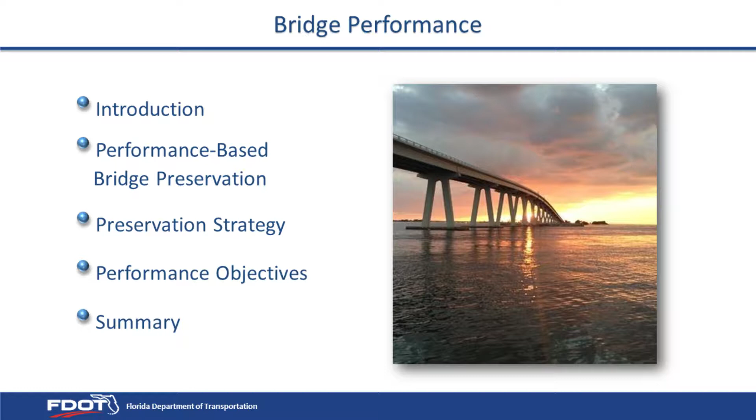I'm happy to be here with you this morning to share our experiences with ongoing efforts related to the development of bridge preservation-related performance measures. After a brief introduction, we're going to talk a little bit about how we're currently set up in usage of various performance-based mechanisms that provide work on our bridges. I'm going to talk a little bit about preservation strategy we'd like to promote further in the future, as well as some performance objectives that may be tied to that strategy.

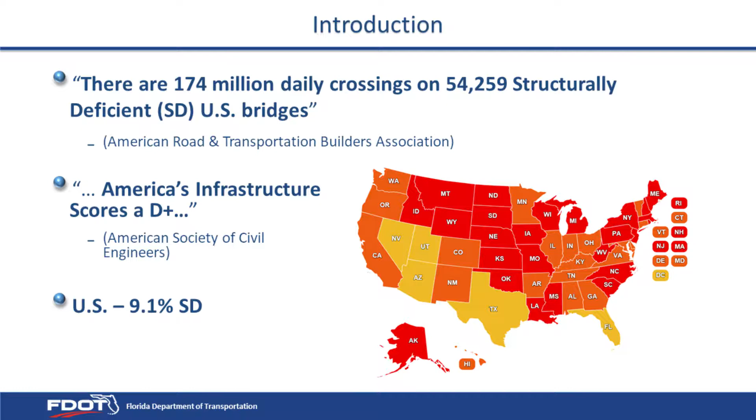First, I think here are a few headlines that are all too familiar with us these days. 174 million daily crossings on over 54,000 structurally deficient bridges in the United States today. Wow, that's a lot of people. ASCE indicates America's infrastructure scores a D+. Well, that's not too reassuring. So right around just under 10% of all bridges in the nation are currently considered structurally deficient today.

But here's the good news, though. For any of you guys who have been tracking that number, we've been steadily trending downward for as long as we've been reporting on that metric, percent structurally deficient bridges. So we must be doing something right. I think a lot of that has to go with the amount of research and focus that we put in this area as an industry. How's the saying go? If you measure it, you will achieve it. Something like that. That's exactly what we want to talk about today. Developing performance measures to drive bridge preservation type strategies and activities.

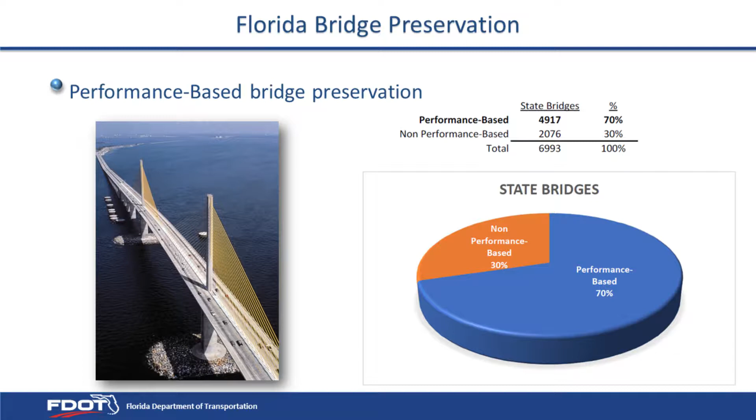So originally when we began looking at this type of information, I would say our focus was more related to our various performance-based contracting mechanisms. For those that may not be aware, Florida has been steadily transitioning more and more to greater use of performance-based contracting to operate and maintain our transportation infrastructure. We have shorter term, what we call asset maintenance type contracts, where the contractor will assume the risk of all general maintenance and repair type activity. And we also have longer term concessionaire type contracts where the contractor will assume a bit more risk, usually in the form of either rehabilitation or replacement should the need arise within the term of that contract.

So right around 70% of all state-owned bridges are currently included within the scopes of these contracts, some way, shape, or form. And that's almost 5,000 bridges, and that includes some of our biggest and most prominent bridge structures. So our current processes for driving the work on bridges is pretty heavily dependent upon our inspection activity to identify work needs and drive our work programs. So we think that there's opportunity for greater consideration for doing those types of things that pay long-term dividends for us over time. So a little bit on the approach.

So about a year ago, we established a small technical working group we call the Bridge Performance Group. The main focus of this group is to review our various performance-based mechanisms that provide work on our bridges and look for opportunities for improvement. So it's an 8-member group, and given the contribution that private industry plays in caring for our bridges here in Florida, we thought it was pretty important to include their representation within this group. So we have 3 serving members from individual private industry firms who participate in our performance-based programs. We have 2 serving members from our central office, as well as 3 serving members from some of the districts.

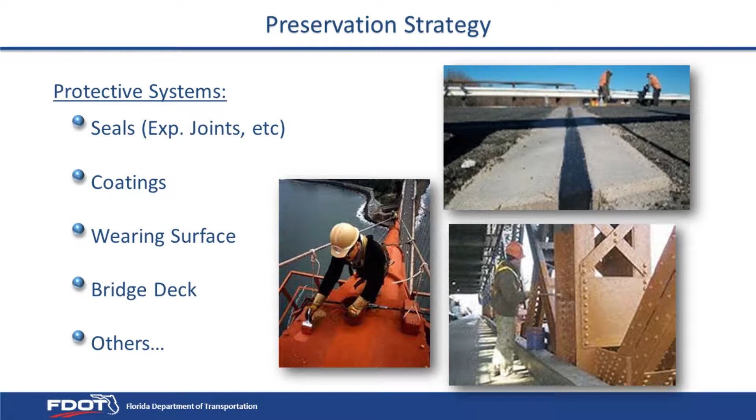So as far as bridge structures, we know that there are certain types of elements and components on bridges that I guess I would say serve more of a protective role in nature. Things like our expansion joint systems and our seals help keep our water and debris up on top of the deck. Things like our coating systems help protect our structural steel from corrosion and degradation. Wearing surface helps protect our bridge deck from traffic-related abrasion.

Even the bridge deck itself can play a protective role in nature at times. I think sometimes we look at the bridge deck, it's kind of the roof of our house. Sometimes if our roof starts to leak, we know it typically contributes to bigger problems down below for us. Are there others? Absolutely. This is just a short list of some commonly recognized protective systems for bridge structures.

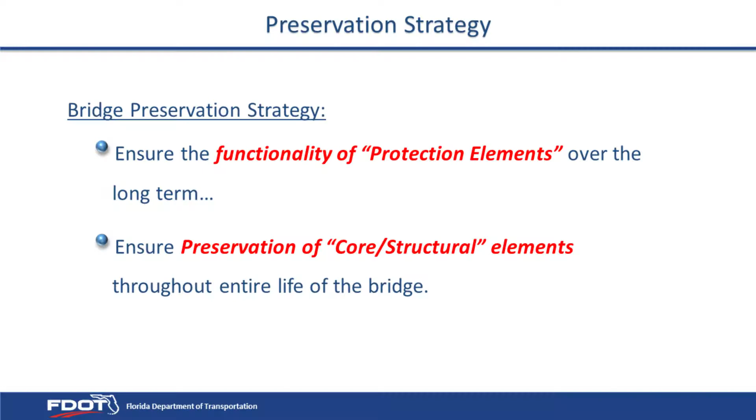So as far as overall strategy, we know that it's usually a pretty good idea to continually ensure the functionality of those systems that are more protective in nature. If we do this consistently and effectively over the long term, we stand a pretty good chance of preserving our core structural elements throughout the entire life cycle of the bridge. Sounds like a plan. So how do we drive performance as it relates to these goals?

Well, we know the bridge inspection process is a pretty valuable tool in our toolbox. Our inspectors are out there generally once every 2 years, reporting on condition and function of every element and component on the bridge. We call this our element level inspection criteria. So we assign a condition rating on a scale of 1 to 4, 1 being the best, 4 being the worst, on every unit of every element on the bridge. So there's lots of detailed data that's generated through this process.

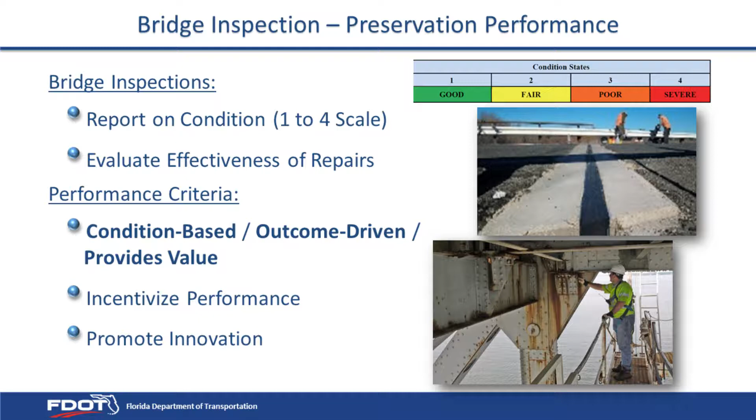So we think that there's opportunity to leverage the value of that data to inform and report on the condition and function of those systems that are more protective in nature, to make sure that we're doing the right things at the right time. So as far as performance criteria, we believe there's opportunity for what we're calling condition-based, outcome-driven performance measures that will serve to provide value in the overall life of the bridge.

Remember those 3 terms, condition-based, outcome-driven, and provide value. I'm going to talk a little bit about each one in detail in the next few slides. We believe, if appropriately established, they will serve to incentivize performance and promote innovation as a whole in our processes. So what types of things are we talking about?

Well, we believe there's value in minimizing the leakage in our deck joint systems, because when our deck joints begin to leak, we can see elevated rates of deterioration in portions of the bridge in the immediate vicinity of those leaky joints, especially for steel superstructures and bearing components. We believe there's value in maximizing the effectiveness of our coating systems.

For any of us who have watched our coating systems degrade, we know it's never uniform. Typically, we get early onset and breakdown in those hard-to-coat areas first, whether it's on the nuts and bolts, the edges of plates, those areas that collect debris, retain moisture. We believe there's value in ensuring a uniform level of protection for all of our steel components out there.

So when I mention condition-based, generally we're talking about leveraging the reporting that occurs through our bridge inspection process to inform on condition and function of those systems that are more protective in nature. For any of us who have recently observed the changes in our inspection standards, we know that our information has become a little bit more detailed with the advent of new standards.

So no longer are we only reporting on quantities within the individual condition states 1 through 4, but we're also reporting on quantities of what we call commonly occurring defects, which can vary based on material type or even type of system, whether it's an expansion joint system or a bearing system, things of that nature.

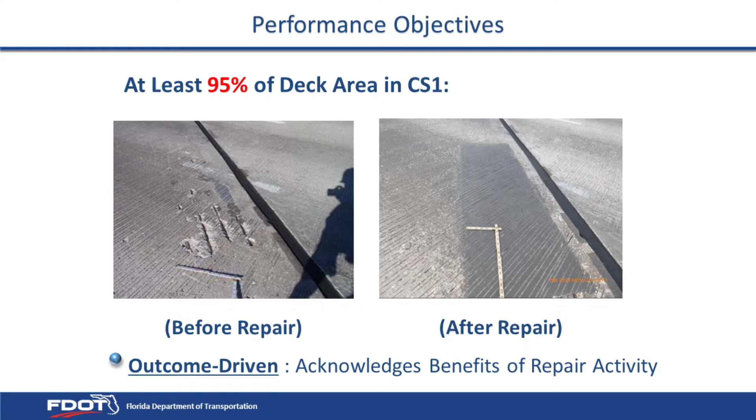That's really the outcome-driven portion of what we're talking about. We'd like our process to acknowledge the benefits of repair activity where appropriate in restoring functionality. Because in the absence of acknowledgement, it becomes a bit more difficult to encourage or even incentivize doing those types of repairs that could pay long-term dividends for us. In this instance, that moves us in the direction of expanding our definition of what we consider good to now also include condition state 2.

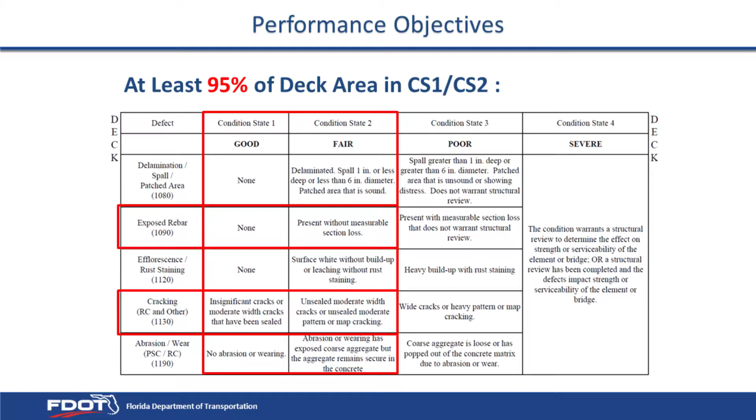What we realize is that now opens up the door for a few other defect scenarios that we may or may not be comfortable with. If we look down below at cracking, we see that condition state 2 allows for unsealed cracks of moderate width. I don't know, on the deck top, an area that's exposed to continual wet-dry cycles. In the north, we're putting chlorides on our decks. Not in Florida, but northern states.

We could be exposing our reinforcement to undue corrosion activity. Certainly, exposed rebar, defect 1090, condition state 2 allows for present without measurable section loss. Really, this is what we're talking about.

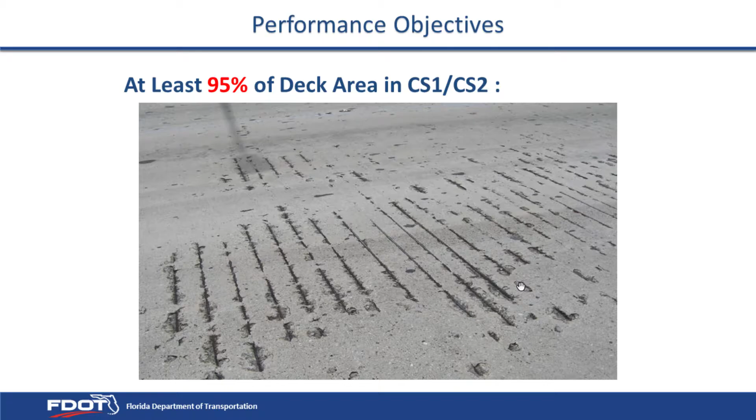Sometimes, for any of us who have ever watched our rates of deterioration for reinforced concrete components, we know that there are certain types of scenarios that when they present themselves provide for, let's just say, a tipping point in our overall rate of deterioration. Things really begin to pick up steam. Exposed reinforcement is a good example of that.

Spalling occurs. If reinforcement's exposed, corrosion's initiated. Corrosion is an expansive process, exerting internal stresses within the concrete, contributing to further spalling, further exposed reinforcement, further corrosion initiation. So it just becomes a cycle at that point. So this is a good example of a typical defect scenario that we'd like to take steps to avoid, if at all possible, because it tends to promote higher rates of deterioration in our base components.

And that's really the value aspect of what we're talking about. We want to set ourselves up for success, make sure that we have the greatest opportunity to preserve our bridge structures, to realize our full asset value potential, which has really brought us to where we are today when we consider our performance measure format.

So we're currently considering a format that includes two main parts. So the first part is going to include a condition state criteria, where we look to ensure that we have at least a certain amount of good quantity in support of overall functionality. Second part is going to include defect criteria, where we look to take steps to avoid those undesirable defect scenarios that can promote higher rates of deterioration in our base components.

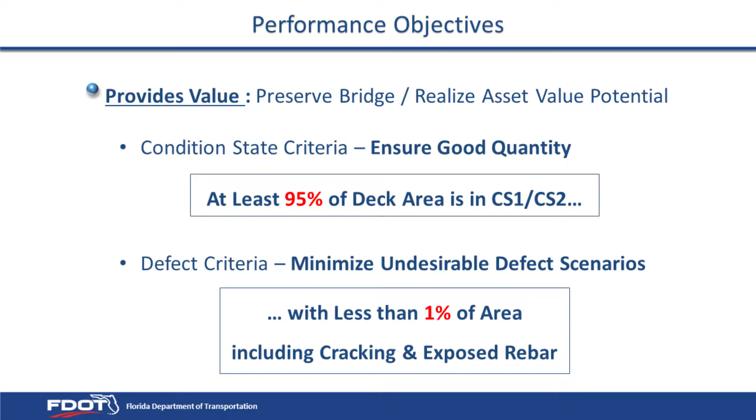So here's that same performance measure in blue restated with the two parts. For the reinforced concrete bridge deck, we're saying we'd like to see at least 95% of our deck area in either condition states 1 or 2, with less than 1% of area including either exposed rebar, defect 1090, and significant cracking, defect 1130.

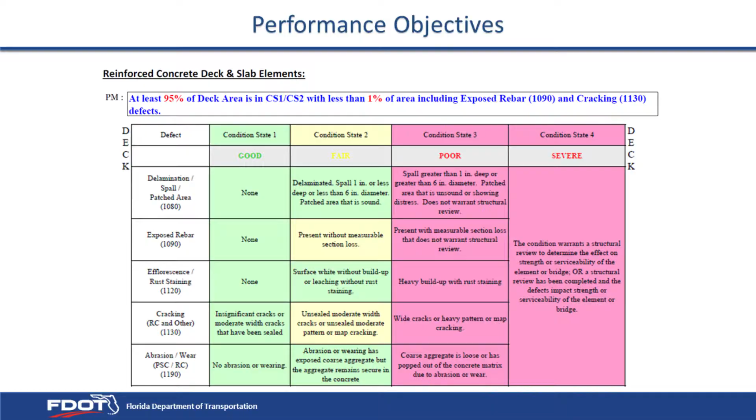So as we look down below into that same table, condition evaluation criteria, we see that everything in green is within the realm of our stated performance objective, acknowledging the benefits of repair activity where appropriate and restoring function, and avoiding those undesirable defect scenarios that can contribute to higher rates of deterioration as much as possible.

So given the same two-part format, we're currently test driving draft performance measures related to the various types of deck systems that we have. Reinforced concrete, pre-stressed concrete, steel, timber decks, and that other category, kind of a catch-all. Again, using that same two-part format, and the only place that they vary is in that defect criteria, that second part, because our commonly occurring defects will vary based on material type.

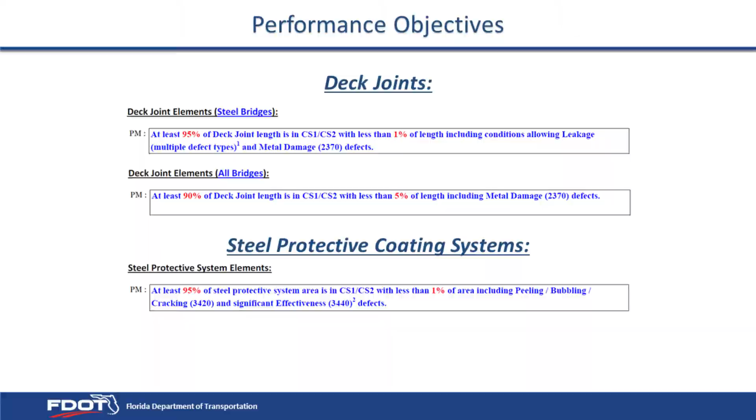We're also looking at 2 on our expansion joint systems and 1 on our steel coatings, again using that same two-part format. So the first one on the expansion joint systems is really targeted for those bridges that mainly contain steel components below the deck that may be vulnerable to corrosion, whether it's steel superstructure or bearing components. So it's really intended to minimize the occurrence of leakage in our deck joint systems as much as possible.

Whereas the second one on the deck joints has a little bit wider tolerances, and it's applicable to all bridges, whether it's concrete, steel, or any other bridge type. And it's really intended to discourage a larger breakdown in our joint system. So we're really trying to stave off those scenarios that might contribute to erosion around our substructure components or debris collection around our bearings.

The one on the steel protective coatings is focused on functionality more than anything else. It's really intended to minimize the occurrence of where our underlying steel is exposed and vulnerable to corrosion. So again, all of these are using that same two-part scenario to ensure a certain level of functionality in those select components and ensure value for us over the long term.

So one thing we realized is that as we reviewed these types of items, we figured that we needed some tools to gauge the potential for them to provide value for us over the long term. And so what we did is we simply developed a spreadsheet that allows us to report on these types of metrics. And it contains a querying mechanism that allows us to interact with our larger statewide bridge inspection database, BRM. And simply allows us to bring in only the information on select populations of bridges however we choose. In this case, we're reflecting whole districts, about 700 bridges.

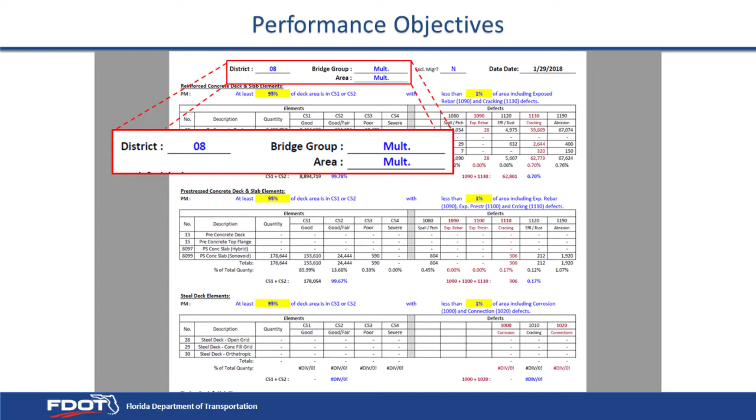We can identify a bridge group, say one tied to a performance-based contract or a maintenance yard designation, however we define it, big or small, and simply set up to report on these types of metrics. What you're looking at here is the deck summary, reflecting on each of those material types, and under each material category we've got a data table reflective of those elements that comprise that material type within our deck systems.

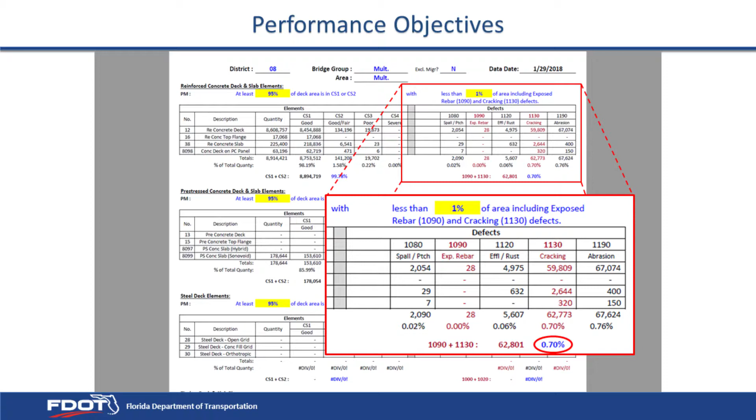The left part of the data table reports on our efforts to ensure we have a certain amount of good quantity, generally condition states 1 and 2, whereas the right side reports on our efforts to minimize the occurrence of those undesirable defect scenarios.

One thing we realized as we began plugging bridge group after bridge group into this tool is that the information could vary due to a lot of different influencing factors. So we developed an overall summary that allows us to view the information in context with those other factors, whether age, detailing, or types of bridges. All information is reported on individual populations of bridges, however big or small.

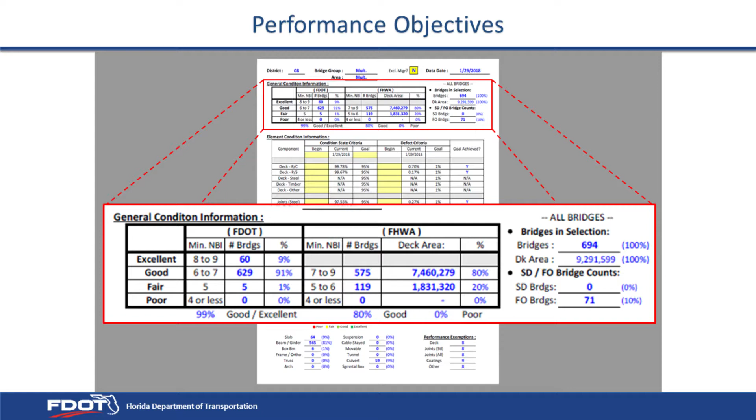The top portion is reflective of our general condition ratings, based on those minimum NBI components. In Florida, we've used a 4 classification scale for a long time: excellent, good, fair, poor. We're also reflecting the newer FHWA criteria, which has just 3 categories - good, fair, poor - dependent upon those percentages by deck area.

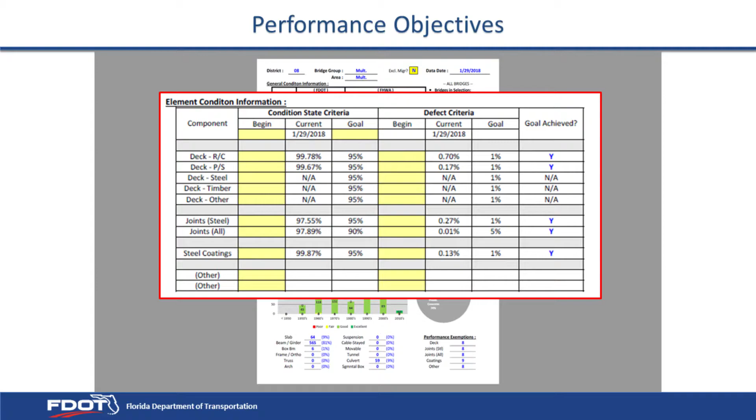In the middle, we're reflecting on those element level performance measures that support our bridge preservation objectives - listing those we spoke of: 5 on the deck, 2 on expansion joints, 1 on steel coatings, and we've left room for others as well.

We wanted to set up a framework that allows us to view the change in this type of information over time on these metrics. For example, if we had a 10-year performance-based contract, we could record baseline data in the beginning column at the start of the contract and provide interim reporting, probably on a 2-year basis, as we progress through the term to make sure we're staying within our performance expectations.

Down on the bottom, we're reflecting various bits of miscellaneous information - those other influencing factors. We're listing decade of construction, which gives us a sense of detailing, general condition, bridge types, our material distribution - just to give us a sense of what potential challenges may lie within this particular population of bridges.

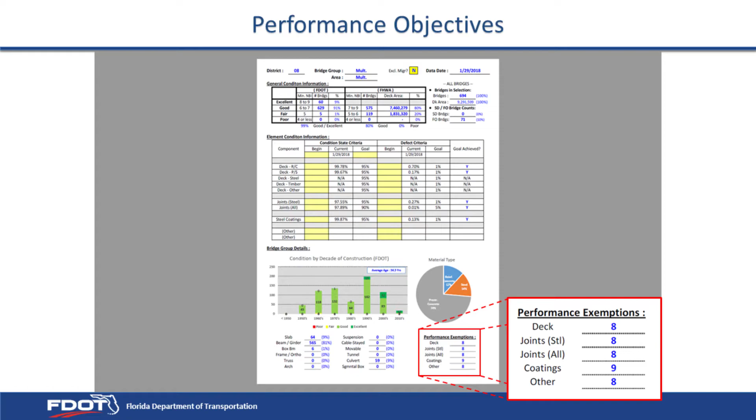Down here on the right, you see performance exemptions - a tool we developed that allows us to better coordinate with ongoing work on our bridges. It's listed as an exemption in the respect that it allows us to omit either select bridges or portions of bridges from the element level reporting that supports our bridge preservation strategies.

For example, if we have a lot of bridges coming out of service, we could omit the reporting on those bridges. In a sense, when we turn off the reporting, that's the driver of that type of work activity, because we really want to make sure our valuable bridge preservation resources go to those bridges that need it most - bridges that will be in service for a while.

In summary, we're currently looking at condition-based, outcome-driven performance measures that we believe will provide value in the overall life of the bridge related to our deck systems, expansion joints, and steel coatings. Are there others? We've been talking a lot about movable bridges lately. We'd really like to wait until we get to the end of our first bridge inspection cycle - the first 2 years, we'll be there probably in January of next year - before we finalize those performance thresholds.

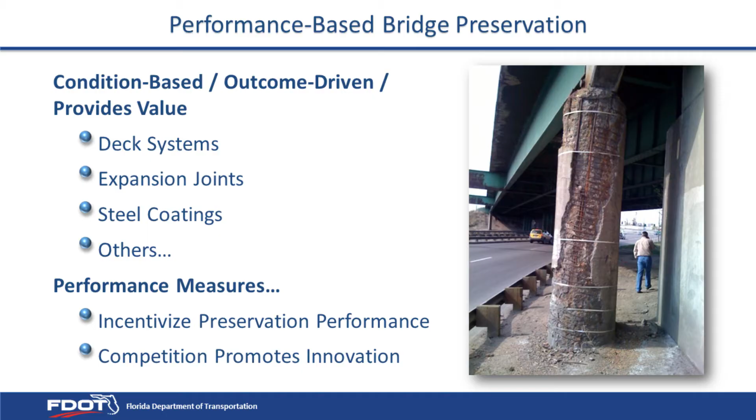We believe performance measures, if appropriately established, will serve to incentivize preservation performance in all of our processes, whether there's a performance-based contract or not, and provide an opportunity for our best and brightest contractors to compete for our business on the basis of bridge preservation, which is really a win-win situation for all.

You mentioned a couple of times you want to maximize condition states 1 and 2, and also have a focus on minimizing the undesirable defects. Why are those two separate? If you focus on minimizing, won't the maximization automatically happen? Remember when I said the devil's in the details?

As we look at the various criteria contained within each of those condition states, some condition states are worse than others, or some defect scenarios are worse than others within the same condition state. So it's not always uniform. We really want to take steps to ensure we had an outcome-driven process which acknowledged the benefits of repair activity and addressing those deficiencies that could pay long-term dividends for us, really taking steps to avoid scenarios that promote elevated rates of deterioration. That's why I used exposed reinforcement as an example.

The unit of measure for the elements influences how some of these performance measures actually function. What insight have you got, since you've been doing this for a while, on the influence of the unit of measures and what changes should be considered by AASHTO for unit of measure changes for some of these elements?